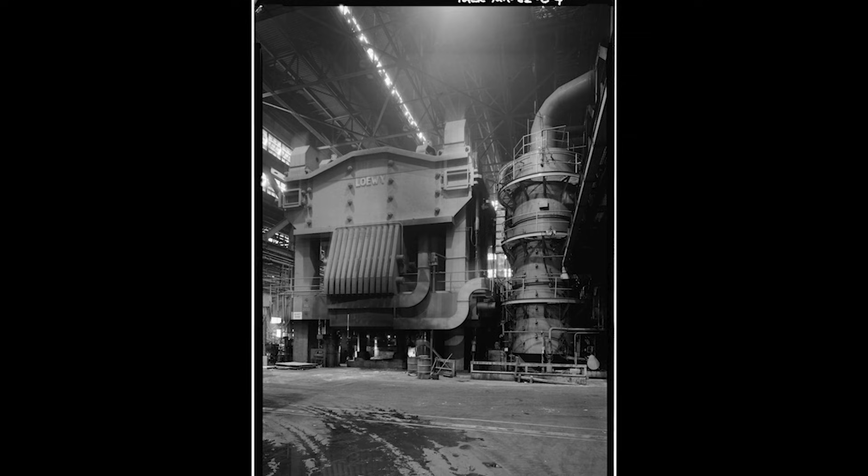May 15, 1945. A bombed German aircraft factory outside Munich. The engineering report from visiting Allied inspectors would never fully capture what they discovered in the twisted wreckage that morning. German fighter planes that weren't assembled like American aircraft, they were forged. Single-piece magnesium wings pressed by hydraulic machines, generating 33,000 tons of crushing force.

Through the smoke and rubble of the destroyed facility, massive steel press columns lay toppled like fallen monuments to engineering that American experts had never imagined possible. No riveted joints, no welded seams, no assembly lines full of workers connecting hundreds of small parts. The Germans had been building aircraft like sculptures, shaped from solid metal blocks under pressures that defied American manufacturing wisdom.

In American factories, engineers insisted that presses larger than 18,000 tons were impractical. The hydraulic systems too complex, the steel castings too massive to control. Most believed 30,000 tons represented the absolute ceiling of mechanical possibility. The Germans had exceeded that ceiling and planned machines nearly twice as large. 8,000 miles from the ruins of Munich, American military planners faced an impossible choice: build presses that European experts claimed would destroy themselves, or accept permanent technological defeat.

Lieutenant General Kenneth B. Wolfe stood in the wreckage of the Messerschmitt facility, his engineering background allowing him to read the destruction like a technical manual written in twisted steel and shattered concrete. The massive hydraulic press that had dominated the factory floor now lay in sections, its 33,000-ton capacity evident even in ruin. What struck him wasn't the scale of German ambition, but the methodical precision with which they had achieved the impossible. Each wing component for the Me-262 jet fighter had been shaped from solid aluminum billets under pressures that American metallurgists insisted would fracture any hydraulic system ever designed.

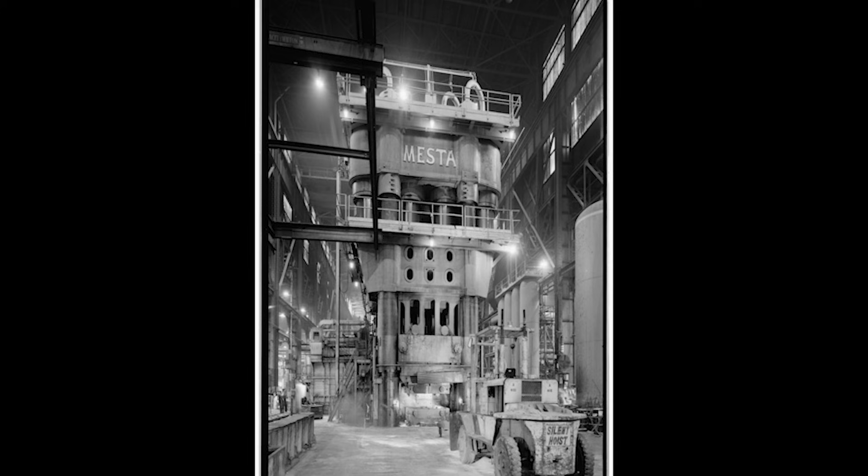Within 18 months, American intelligence confirmed Soviet engineers had dismantled the Munich facility piece by piece, shipping the 33,000-ton press and all associated blueprints to manufacturing centers beyond the Urals. The technical specifications that Wolfe had studied in bombed German factories were now serving Stalin's aircraft designers. By 1947, Soviet jet prototypes were appearing over Eastern European airspace with single-piece wing structures that American engineers recognized as German-influenced design. The Cold War had inherited World War II's unfinished technological revolution.

The crisis deepened when American aircraft manufacturers began designing jets for speeds approaching twice the speed of sound. Traditional riveted wing construction created vibration patterns and stress concentrations that could tear aircraft apart at supersonic velocities. Boeing engineers calculated that their experimental B-52 bomber required wing spars machined from solid aluminum billets weighing 8 tons each, components far beyond the capacity of any American press. Convair's supersonic fighter prototypes demanded wing roots forged under pressures exceeding 40,000 tons. The specifications weren't theoretical exercises, they were operational requirements for aircraft that would determine American air superiority against Soviet jet development.

European metallurgical experts, led by voices like Dr. Heinrich Brenner, maintained their long-standing position that hydraulic systems above 30,000 tons represented fundamental engineering impossibilities. Brenner's calculations, widely respected throughout American technical circles, demonstrated that larger presses would suffer catastrophic hydraulic failures due to uncontrollable pressure fluctuations and materials science limitations that no amount of American engineering enthusiasm could overcome. His correspondence with Air Force planners consistently emphasized that German press development had pushed hydraulic technology to its absolute limits, and Soviet attempts to exceed those limits would likely result in spectacular industrial disasters rather than manufacturing breakthroughs.

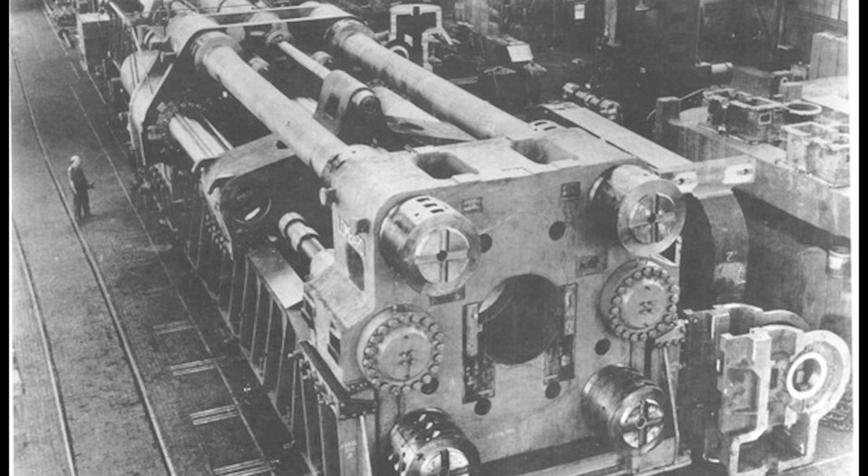Iverson's initial response reflected decades of engineering conservatism that had built Mesta's reputation for reliable industrial machinery. The company had supplied steel mills with equipment that operated for decades without major failures, but such reliability was achieved through proven design principles and tested materials. The Air Force specifications pushed beyond proven limits into territories where failure could mean catastrophic destruction of equipment worth millions of dollars.

European experts had established theoretical boundaries for hydraulic press development based on sound metallurgical principles and centuries of mechanical engineering experience. Yet Iverson recognized that conventional wisdom was colliding with national necessity. Soviet capabilities were advancing while American aircraft manufacturers struggled with technological limitations that enemy engineers had already overcome. The choice wasn't between safe engineering and risky innovation. It was between accepting permanent technological disadvantage or attempting achievements that would restore American industrial supremacy.

The heavy press program represented America's commitment to engineering excellence over European caution, industrial ambition over established limitations. The decision to proceed came not from confidence in success, but from recognition that failure to attempt the impossible meant accepting defeat by adversaries who had already achieved it.

Mesta Machine Company's West Homestead foundry had built its reputation on the impossible, but the specifications spread across Lorenz Iversen's desk represented challenges that exceeded even Carnegie Steel's most ambitious projects. The proposed 50,000-ton press demanded steel castings larger than locomotives, hydraulic cylinders 14 feet in diameter, and supporting columns 76 feet tall that would remain straight under loads equivalent to the weight of an entire steel mill.

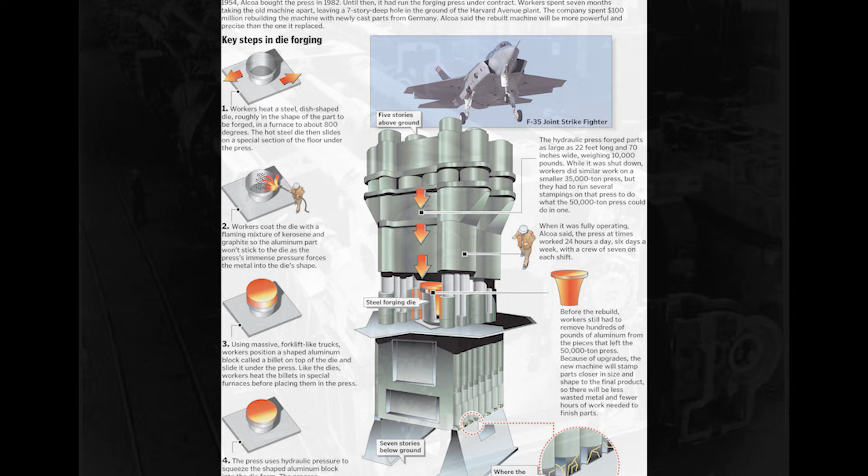Iverson's response demonstrated the fundamental difference between American and European engineering philosophy. Where European designers built to proven specifications with established safety margins, American engineers embraced over-engineering as a design principle. If hydraulic pressures threatened steel containment, American designers would use steel twice as thick as calculations required. If casting tolerances approached materials science limits, American foundries would develop new techniques that exceeded those limits by comfortable margins. The approach wasn't reckless, it was systematic application of engineering overkill to ensure success under conditions that had never been tested.

The casting challenge became Mesta's first technical breakthrough. Pouring 350 tons of molten steel required furnace temperatures of 3,000 degrees Fahrenheit and cooling strategies that controlled solidification across masses that dwarfed anything previously attempted. Traditional casting techniques relied on predictable cooling patterns for objects weighing less than 50 tons.

350-ton castings created thermal dynamics that could produce internal stresses capable of cracking steel columns like glass figurines. Mike Kowalski's foundry crews developed custom pouring procedures that staged molten steel delivery through multiple furnaces, controlling cooling rates across massive steel volumes with precision that metallurgists had declared impossible.

The breakthrough came through American willingness to attempt techniques that European foundries considered too risky. Kowalski's workers constructed specialized molds that controlled cooling through calculated placement of steel chills and insulating materials, creating predictable thermal gradients across castings larger than railroad engines.

The process required 12-hour shifts where foundry workers monitored molten steel behavior with timing measured in minutes. Delays of even 30 minutes could result in cooling patterns that would ruin months of preparation and waste tons of premium steel alloys. Transportation presented equally unprecedented challenges.

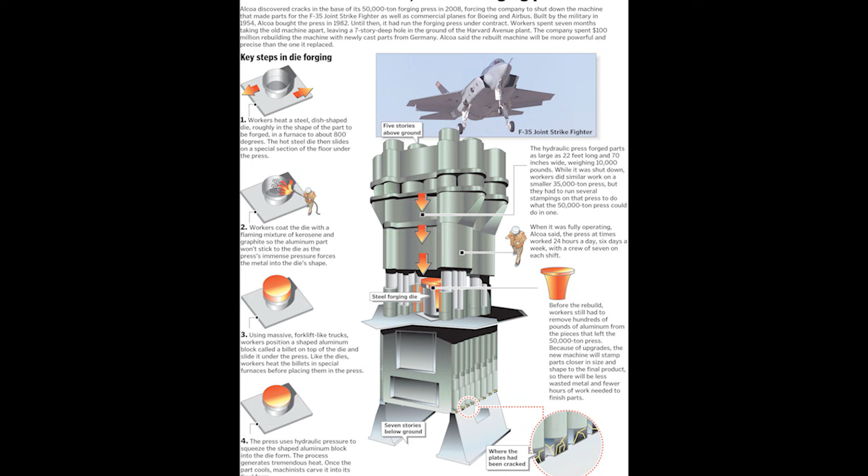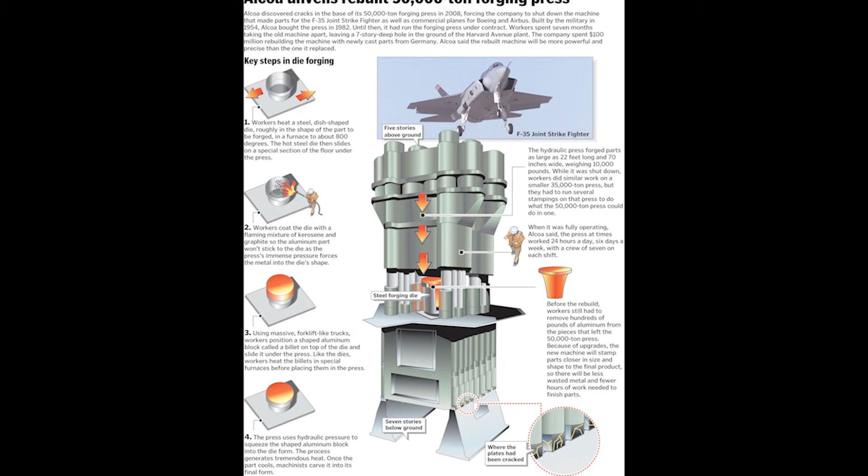Routes had to be surveyed to ensure bridge capacities could handle the concentrated loads, and railway officials required structural analyses proving that track systems wouldn't be damaged by repeated passage of equipment carrying unprecedented weights. The precision requirements bordered on the absurd.

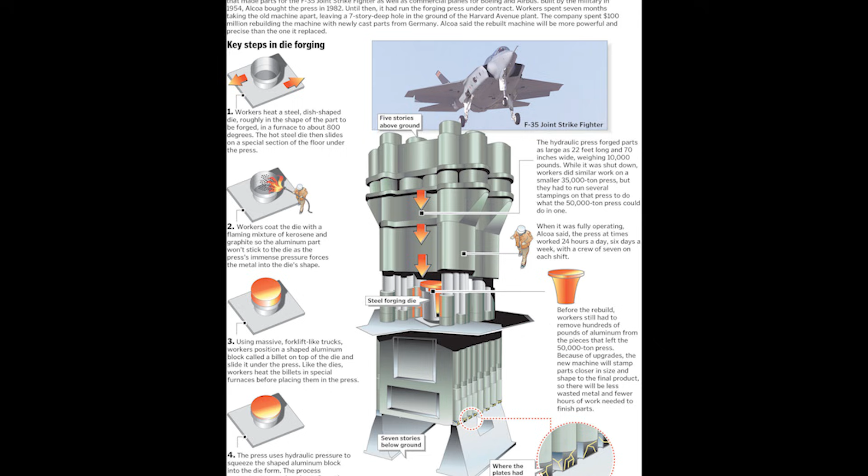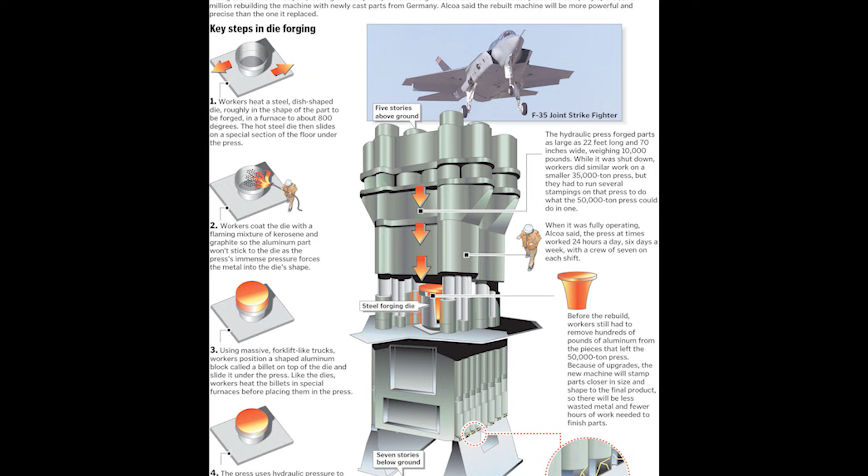Mesta's machine shops developed threading techniques for steel components so large that conventional measurement tools couldn't span their dimensions. By early 1951, Mesta foundries were successfully pouring steel castings that exceeded European size limitations by factors of 3. The metallurgical analysis revealed steel grain structures superior to smaller welded assemblies, proving that American over-engineering had achieved not just unprecedented size, but superior material quality.

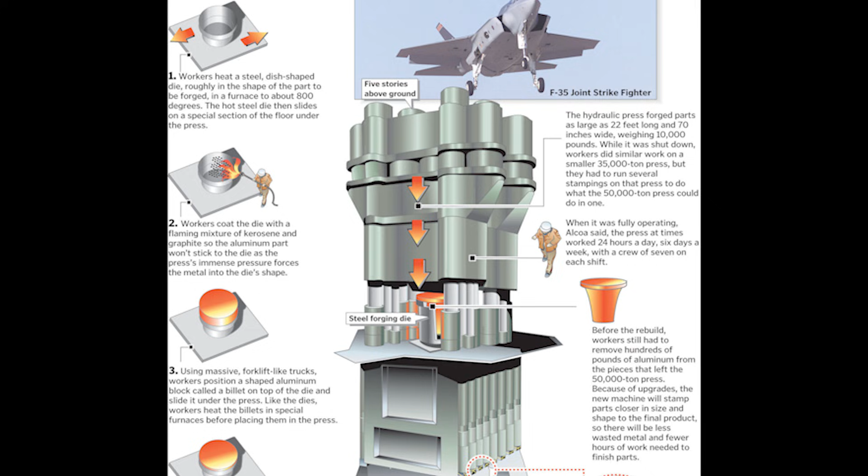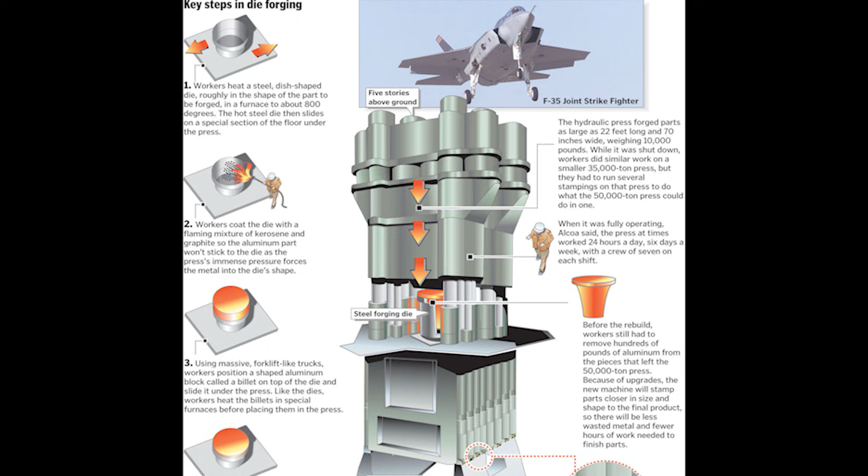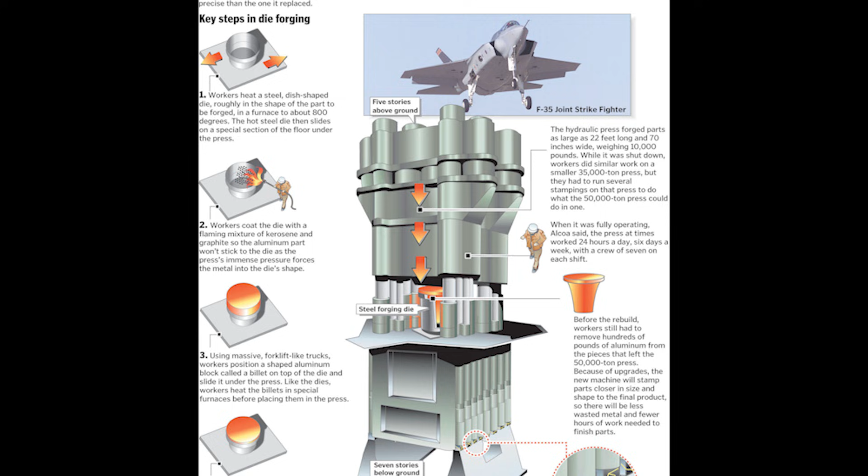The first 350-ton casting emerged from cooling molds with internal structure uniformity that surpassed European predictions for maximum achievable quality in large steel components. European experts had been wrong about the fundamental limitations of large-scale steel casting, but Mesta's success represented only the first phase of challenges that would determine whether American industrial ambition could transform theoretical specifications into operational machinery capable of reshaping global manufacturing capabilities.

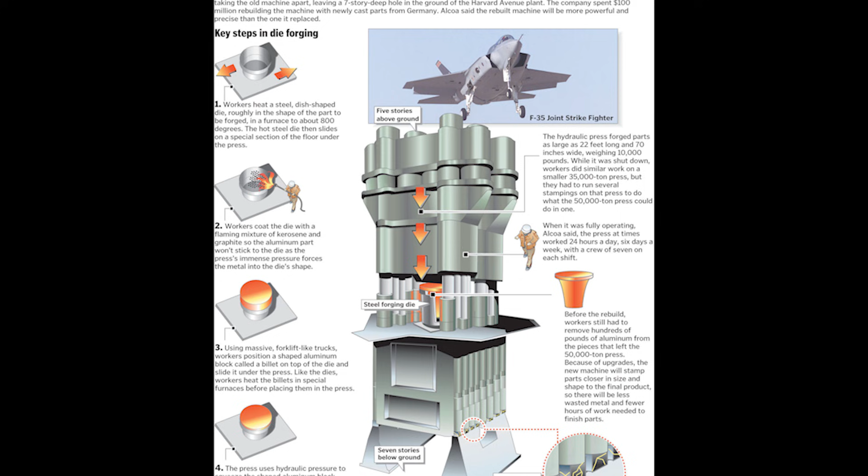The physics of cooling 350 tons of molten steel threatened to invalidate every theoretical breakthrough Mesta had achieved. Steel contracts as it solidifies, and the shrinkage rates across massive castings created internal stresses that could crack even perfectly poured components during the cooling process.

Traditional foundry wisdom held that castings above 50 tons required sectional pouring techniques that assembled multiple smaller pieces through welding or mechanical connections. The alternative, attempting to control thermal dynamics across steel volumes equivalent to small buildings, had never been successfully demonstrated at any foundry in industrial history.

Mike Kowalski understood the metallurgical realities better than most engineers with advanced degrees. 30 years of pouring large castings had taught him to read molten steel behavior through subtle changes in color, flow patterns, and surface characteristics that indicated internal temperature variations invisible to instruments.

350-ton pours created thermal gradients that extended beyond his experience, but Kowalski recognized that success would depend on foundry workers developing intuitive understanding of steel behavior at scales where miscalculations would waste months of preparation and tons of premium alloy materials. The custom furnace systems represented American engineering's response to limitations that European foundries had accepted as permanent.

Mesta constructed multiple interconnected furnaces capable of maintaining molten steel at precisely controlled temperatures while coordinating simultaneous pours that filled massive molds through carefully timed sequences. The furnaces themselves required steel-lined chambers that could withstand 3,000-degree temperatures for hours without degradation, and fuel systems that delivered heat with consistency that varied less than 50 degrees across the entire pouring operation.

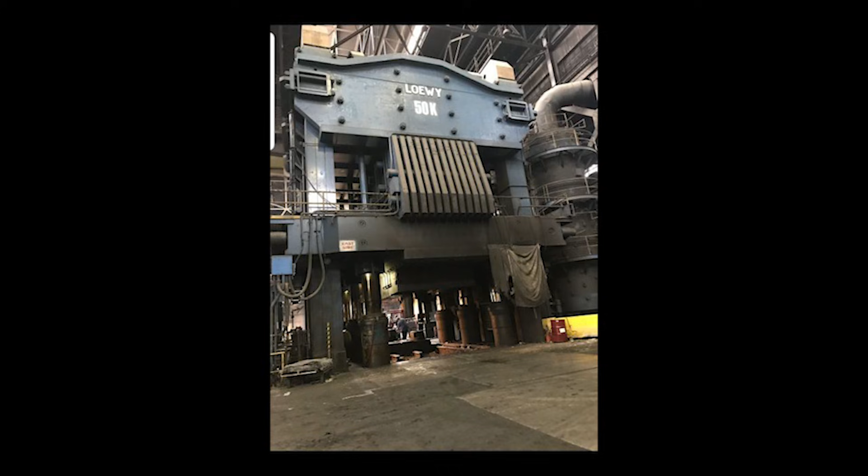Kowalski's workers discovered that controlled placement of steel chills, metallic inserts that accelerated cooling in specific locations, could create predictable thermal gradients that guided shrinkage patterns throughout massive castings. The technique required understanding how steel would contract during solidification and positioning cooling controls to ensure uniform stress distribution across components weighing more than loaded freight trains.

Transportation logistics became engineering challenges that matched the complexity of the casting process itself. Moving 350-ton steel components from Pittsburgh foundries to Cleveland assembly sites required custom railroad equipment designed specifically for loads that exceeded conventional freight capacity. The specially built railroad cars featured reinforced frames with 64 wheels distributed across extended wheelbase configurations that spread concentrated weights across longer sections of track. Bridge inspections along transportation routes revealed that several railroad spans required structural reinforcement to handle repeated passage of equipment carrying unprecedented loads.

The machining requirements pushed American manufacturing capabilities toward their absolute limits. Finishing 76-foot steel columns demanded custom-built lathes with beds extending across entire factory buildings and cutting tools capable of maintaining precision tolerances across steel components longer than most city blocks. The 96-inch lathes represented manufacturing equipment that existed nowhere else in global industry, designed specifically to meet specifications that no other project had ever required. Tool wear became a critical concern, as cutting implements that could machine steel of this scale and hardness represented specialized equipment that couldn't be easily replaced if damaged during operations.

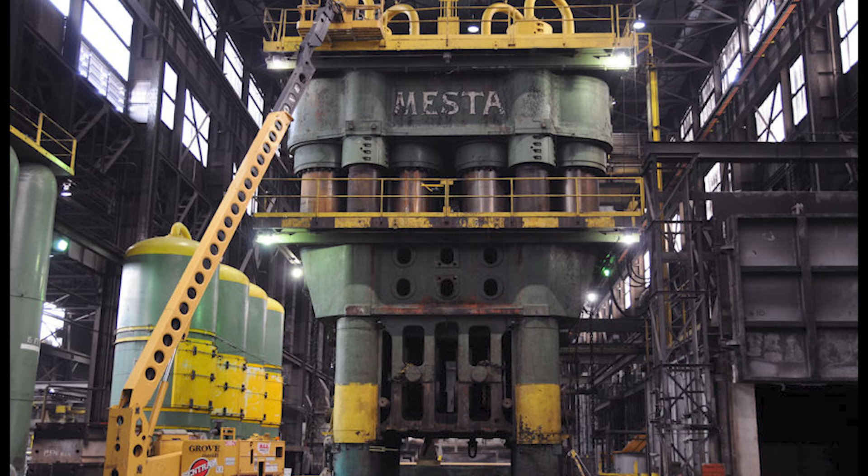The completed steel castings arriving in Cleveland presented Alexander Zeitlin with an engineering paradox that threatened to invalidate years of technical breakthrough. How do you assemble an 8,000-ton machine when the largest available crane can lift only 200 tons? Traditional assembly methods relied on overhead lifting equipment that could position components with precision, but the press columns alone weighed 350 tons each, nearly twice the capacity of the most powerful mobile cranes in American industrial inventory. European assembly techniques assumed that large machinery could be built through sequential installation of manageable components, but the 50,000-ton press demanded assembly methods that had never been attempted at such massive scales.

Zeitlin's solution demonstrated American engineering's willingness to abandon conventional approaches when conventional methods proved inadequate. Rather than seeking more powerful external lifting equipment, Mesta engineers designed the press to assemble itself through hydraulic systems built into the structure's foundation. Temporary hydraulic jacks embedded in the concrete pier could generate lifting forces that exceeded any crane capacity, positioning steel components through controlled hydraulic pressure applied from below rather than overhead support systems. The technique required extraordinary precision in foundation preparation, as hydraulic lifting points had to be positioned with accuracy that would allow proper alignment of components weighing more than loaded locomotives.

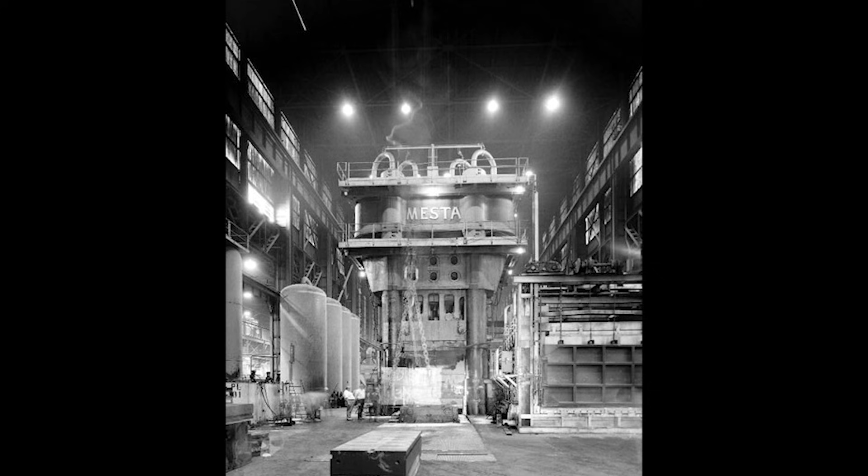The hydraulic control systems represented technological achievements that surpassed European hydraulic engineering by generations. Water pressurization to 7,000 pounds per square inch required pumping equipment that could maintain pressure consistency across hydraulic circuits extending throughout the entire press structure. The pressure regulation demanded control valves that could modulate massive hydraulic flows with precision that varied less than 50 pounds per square inch across operational cycles lasting several minutes. Hydraulic fluid contamination became a critical concern, as particles that would be insignificant in conventional machinery could cause valve failures that would disable equipment worth millions of dollars.

By spring 1955, the completed press dominated Cleveland's industrial landscape like a mechanical cathedral designed for purposes that transcended conventional manufacturing. The structure rose 285 feet from foundation to peak, with 118 feet extending below ground level into bedrock formations that anchored the entire assembly against forces that could shift buildings. The visible portion suggested only half the engineering achievement, as foundation systems and hydraulic equipment represented technical complexity that matched the dramatic scale of above-ground components.

The moment of verification arrived on May 5, 1955, when Mesta engineers initiated the first operational test of hydraulic systems designed to generate 100 million pounds of crushing force. The pressurization sequence began with water pumps gradually building pressure throughout hydraulic circuits that extended through every major component of the press structure. The massive ram descended with mechanical precision that compressed a test block of aluminum into geometric perfection that demonstrated force distribution accuracy exceeding theoretical calculations. 100 million pounds of pressure applied through hydraulic systems that had never been tested at such scale achieved results that validated years of engineering innovation and proved that American industrial ambition could transform unprecedented technical specifications into operational machinery that surpassed every prediction of European engineering limitations.

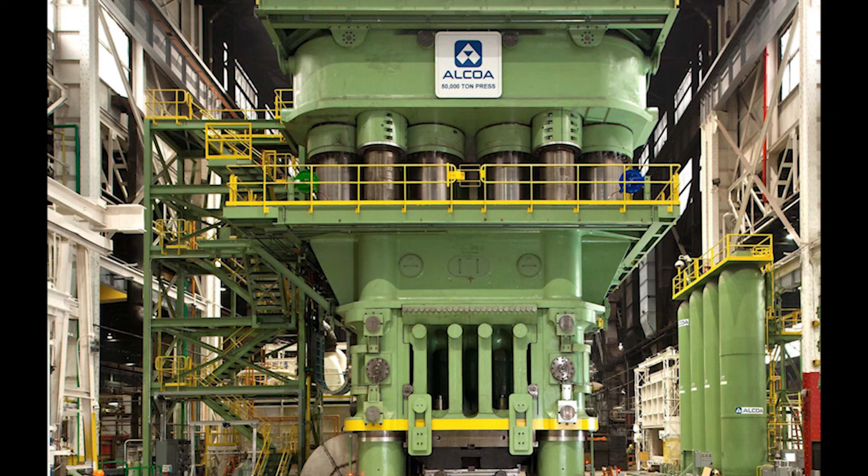Rather than accepting operational limitations imposed by materials science constraints, American engineers developed new metallurgical techniques that addressed stress concentration problems through innovative heat treatment processes that had never been applied to steel components of such massive scale. The heat treatment procedures required controlled heating and cooling cycles that could modify steel grain structure throughout 350-ton castings, relieving internal stresses that had accumulated during operational loading without compromising the fundamental strength characteristics that enabled 50,000-ton pressing capacity.

The stress relief techniques pushed metallurgical science into territories that European foundries had never explored. Heating steel columns to temperatures approaching 2,000 degrees Fahrenheit and controlling cooling rates across components weighing more than locomotives required furnace equipment that could maintain precise temperature distribution throughout steel masses that exceeded the capacity of conventional heat treatment facilities. The process demanded understanding of thermal dynamics at scales where traditional metallurgical principles had never been tested, and cooling control that could modify internal stress patterns without creating new weaknesses that would compromise operational integrity.

Zeitlin's breakthrough came through recognition that the cracks represented predictable responses to operational stress patterns that could be managed rather than eliminated. American engineers developed new hydraulic control systems that varied pressure application throughout the pressing stroke, reducing peak stress concentrations while maintaining the maximum force necessary for aircraft component forging. The variable pressure systems required hydraulic controls that could modulate 100 million pounds of force with precision that prevented stress spikes while ensuring adequate pressure for metallurgical transformation of aluminum and steel workpieces. The hydraulic innovation represented technological advancement that exceeded European hydraulic engineering capabilities by decades.